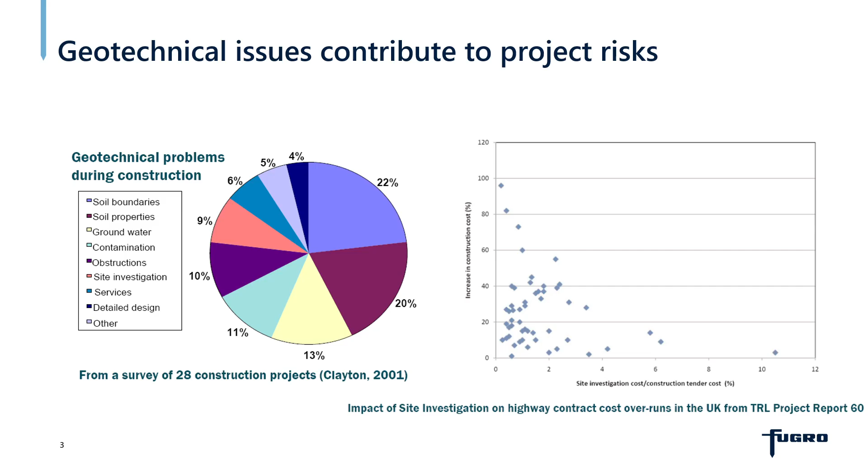So this is not discussing earthquakes, but this slide is. So adding the earthquake component, earthquake-related ground risks. They are often really controlling. For you who practice in seismically active areas, you'll know that in these areas, these types of risks often dominate the risk profile of projects, and they can control even project feasibility, not to mention costs.

And it is our duty as geoprofessionals in the earthquake engineering community to help our clients best manage those earthquake-related ground risks. But what are these risks related to? It's basically the uncertainties, and there are two types of uncertainties that I'm showing here. First, related to the variability in the ground conditions, so uncertainty with respect to how ground conditions vary. Think of it as stratigraphy, but also properties.

And here, let's distinguish between the inherent variability of the ground medium and then the uncertainty which is associated with our limited ability to sample it and characterize it, so due to limited data. And then there is another type of uncertainty which has to do with how the ground and asset will respond to loads, and here I'm going to focus on earthquake loads.

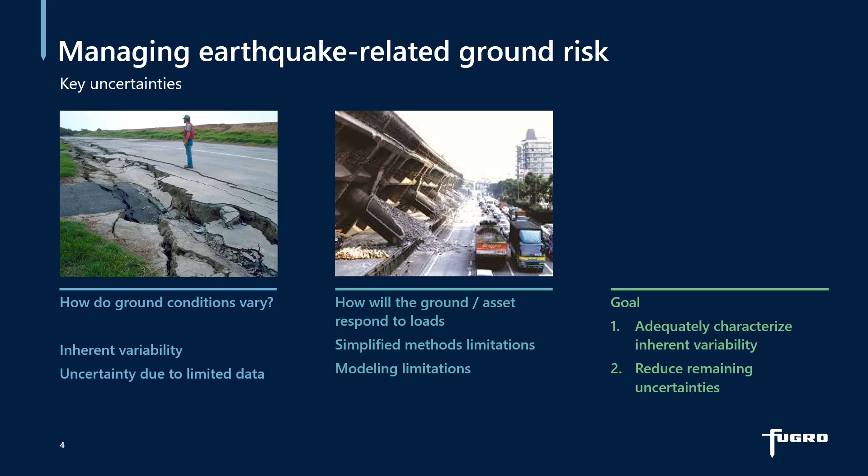So now, looking at the state of practice for seismic design, I think it has come a long way, at least for the past decade or a bit more that I have been practicing, from more prescriptive approaches to performance-based design. Here I'm showing an example from the Canadian Highway Bridge Design Code that specifies multiple hazard levels, and there are performance objectives that are tied to each of these hazard levels. So one would do analysis for several hazard levels and calculate a response of a system.

However, you would notice that for seismic design typically, and this is coming from the same code, a geotechnical engineer would typically use a characteristic geotechnical parameter, which is defined as a cautious estimate of the mean value. And this definition is not very accurate, or there is subjectivity there. It appears that there is an attempt to cover for some uncertainty there, but without really defining or quantifying what cautious means.

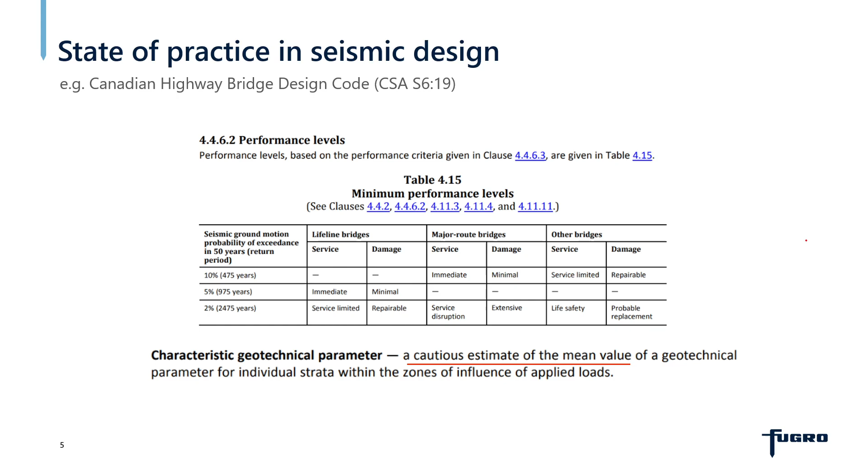But we also know that a cautious mean value is not uniquely defined, right? What is cautious for stiffness may not be cautious for strength. So this is a limitation in performance-based design in seismic engineering. Also, there are a couple of other things to note. These are approaches that are set in a pseudo-probabilistic framework, where essentially a system is modeled with a set of mean-like parameters, or parameters that approximate a mean-like value.

And they are conditioned on a return period for the earthquake loads. But this does not provide a distribution on the outcome. It does not provide a distribution on the decision variable that an owner may need to make decisions. And taking this argument a bit further, for highly nonlinear systems, for brittle systems, the return period of the decision variable may not be the same as the return period of the input earthquake. So there may be a mismatch for some projects, for some systems.

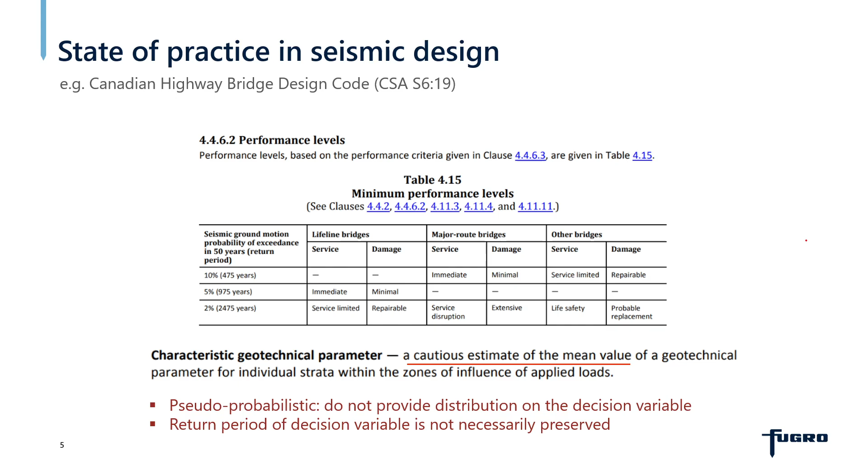There are frameworks that are more rigorous to calculate risk, incorporating uncertainty and inherent variabilities in a rigorous analytical manner, using a series of fragility curves to correlate input motions to output and all the way to a decision variable. And with these approaches, you can calculate a hazard curve for what matters, which is the ultimate decision variable. And this hazard curve can give one the center, the body, and the range of the distribution of that outcome, which is not true for pseudo-probabilistic approaches that we're currently used to.

So with that as a background for the motivation for the talk, and I know I didn't present an outline, these were my introductory slides, I would like then to take this opportunity to present two projects. And in these two projects, there are some common threads. The owner was not able to make decisions for how to move forward because of either the uncertainty in the geotechnical conditions or the complex system. And in these cases, we adopted a risk-based framework to quantify and calculate risk to enable the owner to make informative decisions to move forward.

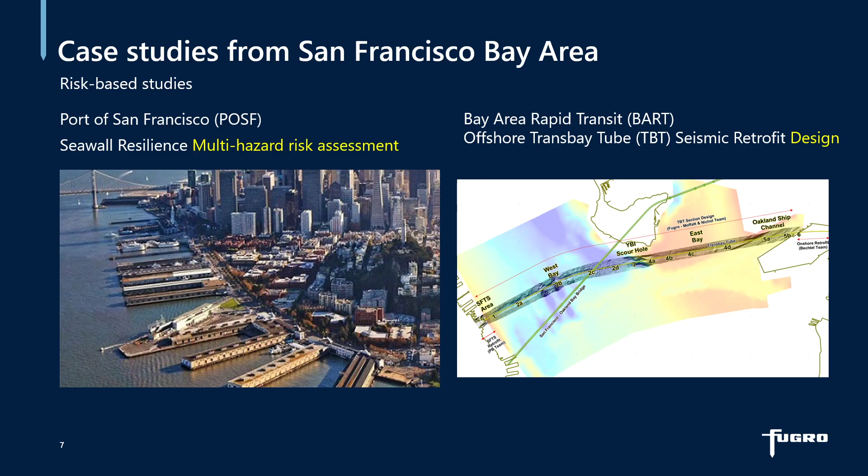The second is the Bay Area Rapid Transit, BART, Offshore Transbay Tube Seismic Retrofit Design Project. This is an immersed tube that connects the cities of San Francisco and Oakland under the bay. And this is a retrofit design project, and you're going to see again we used a risk-based framework to help the owner make decisions with respect to the scope and the extent of the retrofit of this tube.

So looking at these projects and the seismic setting, both are linear infrastructure projects, approximately 5 kilometers long. To the left, the Port of San Francisco, the seawall is the main feature. I'm going to talk about it in detail in the next slides. It essentially marks the northeast edge of the San Francisco Peninsula. To the right is the immersed tube, which connects the cities of Oakland and San Francisco.

And here, these projects are within 15 kilometers of two major faults in the area, the Hayward Fault, which is capable of approximately a magnitude 7.3 characteristic earthquake, and the San Andreas, which is capable of approximately a magnitude 8 earthquake. So this is unlike Vancouver, where you may have different types of seismic sources. We're in active, shallow tectonic margins, and we have well-defined strike-slip faults that control the hazard. These faults produced large earthquakes in the recent past.

The San Andreas fault was responsible for the 1906 earthquake. It was a magnitude 7.9. You may have heard of it as the Great Fire in San Francisco, because many utilities broke and there was devastation caused primarily by fires rather than ground shaking, although there was indeed damage from ground shaking.

And then there was a more recent earthquake in 1989, the 6.9 Loma Prieta earthquake. This was again produced on the San Andreas Fault, but 80 kilometers south of San Francisco. So the shaking levels were relatively low, although we still saw ground failures in that earthquake. The Hayward Fault hasn't produced a strong earthquake since 1868. So this is the one that we're really expecting to go next. And USGS gives a 72% probability of a magnitude larger than 6.7 occurring in the area before 2043.

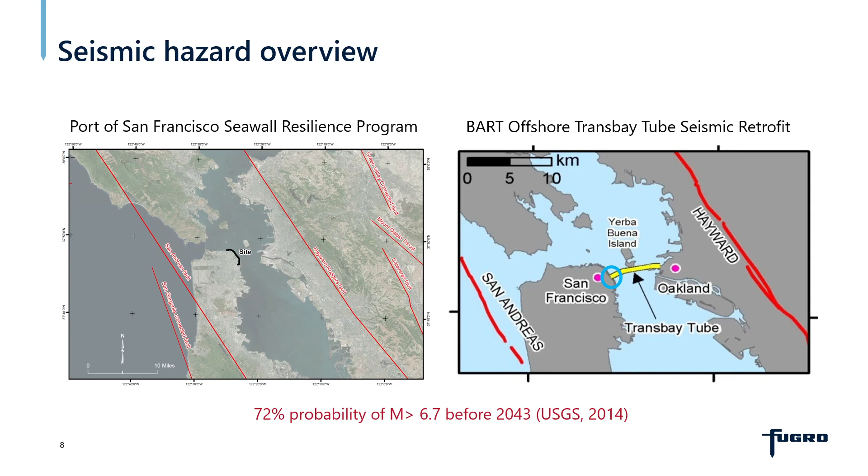So quite a high probability. So let's look at this location here where the two alignments intersect. And this is a pretty picture of where BART transitions from offshore to onshore under the landmark Ferry Building in the Port of San Francisco and continues into the city of San Francisco. So what are the ground motions estimated at that location?

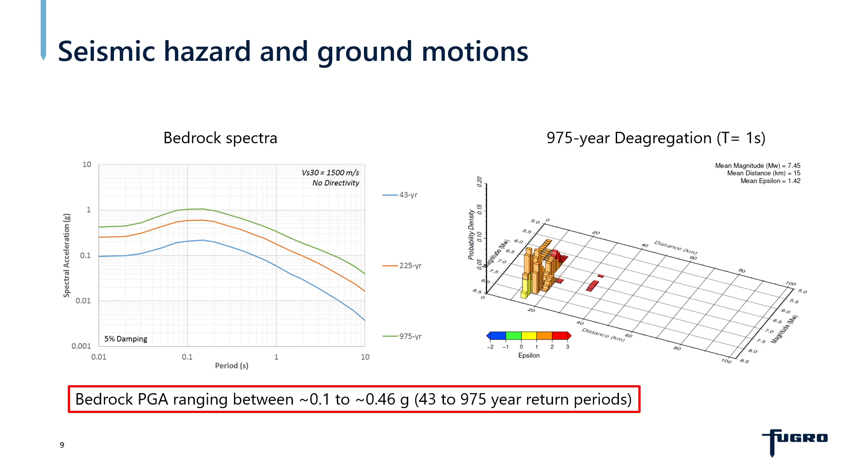I'm showing to the left spectra on bedrock for 3 return periods, starting from the 43 years all the way to 975. And if we look at 975, peak ground accelerations are around 0.45, 0.46 Gs. This is quite high, with similar acceleration levels at 1 second. And you see on the deaggregation plot to the right, this hazard is primarily dominated by events 7 to 8, between distances 10 to 20 kilometers, and these are earthquakes on the Hayward and the San Andreas Fault.

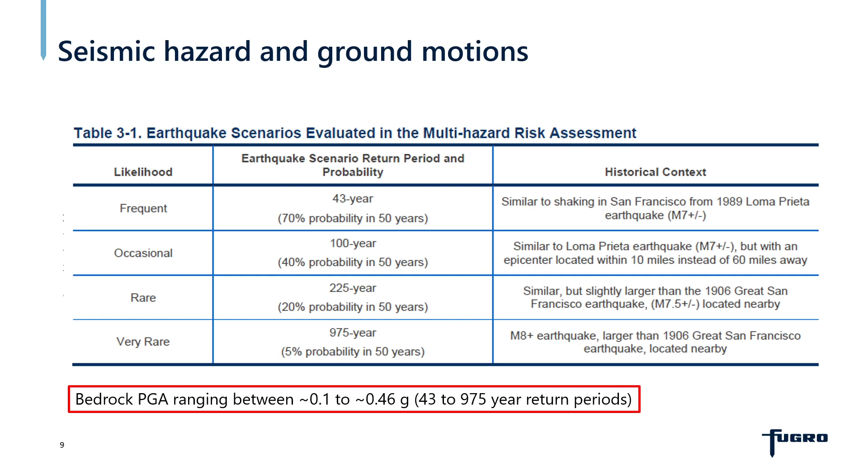So for one of the two projects, the multi-hazard risk assessment included 4 levels of earthquake, which were selected to capture a range from weaker, more frequent events to occasional, rare, very rare events for the 975. And so this is what we performed analysis on. Peak ground accelerations, again, around 0.1 G for the 43-year event, 0.46 approximately for the 975.

And at the heart of this study is the seawall, which defines the transition from land to water. And it's essentially the foundation of the city of San Francisco, of the waterfront in this part. And so the area around the seawall, which is referred to as the waterfront, probably many of you know, you have been there, you have visited. It's a very vibrant area, right adjacent to the bay.

There are a lot of popular attractions: a baseball stadium, cruise ship terminals, markets, promenades, the iconic ferry building. It attracts more than 24 million people per year. There are lots of businesses, restaurants, but also disaster response facilities for evacuation during a potential disaster, transportation networks, utilities. So there is a lot going on, and this area is really the economic backbone of San Francisco with more than 100 billion in assets.

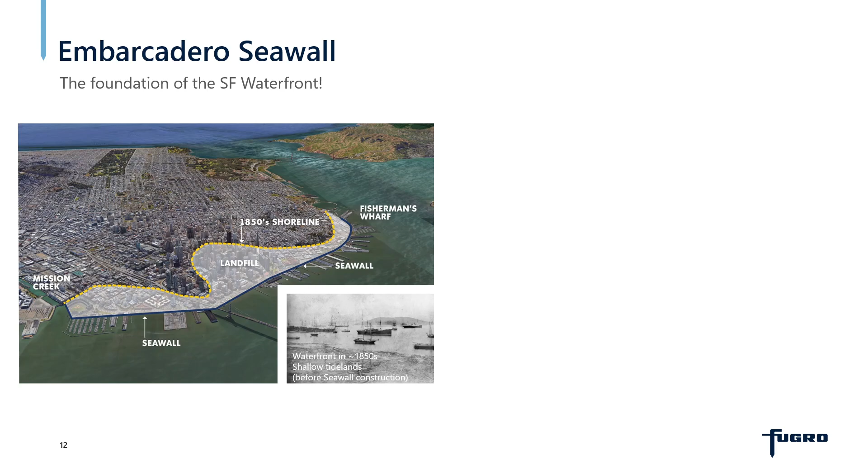Now, the Embarcadero seawall, which you see here in the plan view with the blue line, is the foundation of the waterfront, as I said, and it was built more than 100 years ago, reclaiming land from the bay. You see also there some pictures from before the seawall was built. And looking here at the cross-section, the seawall was built by first excavating a trench in the native soils, which in this case is what is called Young Bay mud. It is a soft to firm marine clay.

Then rock was placed to create this pyramid-shaped dike, which was capped with a concrete wall approximately 3 meters high, although this construction is not the same along the entire length. And then this provided the foundation for pile-supported bulkhead wharfs, and then buildings that were built on those wharfs.

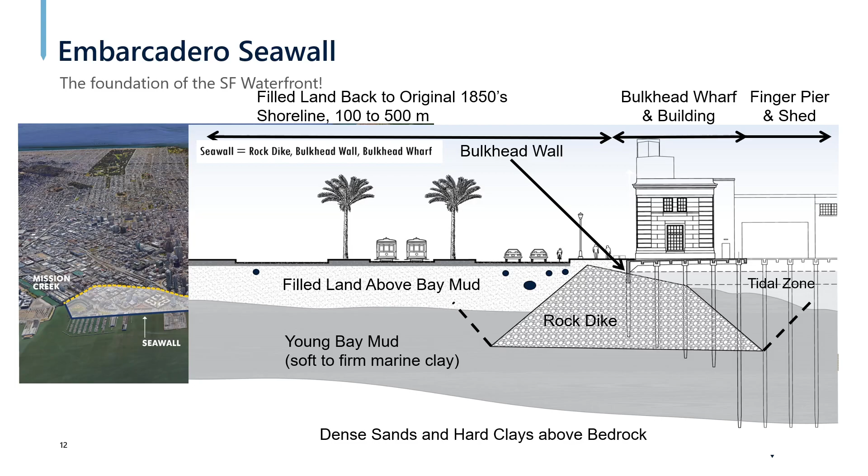To the land side of the seawall, the area was filled with heterogeneous fill that was essentially dumped into place, so we'll see it is liquefiable and quite heterogeneous. And again, all this system was built around the 1900s, so without today's understanding of the high seismic hazard in the area and, of course, today's seismic standards.

So what was the owner, the Port of San Francisco, concerned about? The first hazard was earthquake-related. So the possibility that during strong shaking, the liquefiable fill will lose strength and spread horizontally towards the bay. The Young Bay mud beneath the seawall would also soften up and start to slide towards the bay. This would disrupt the piles, which would break, would damage the wharf, and then that would create damage to the buildings. On the land side, you also see that there would be cracks on the Embarcadero highway, and the evacuation route would be disrupted.

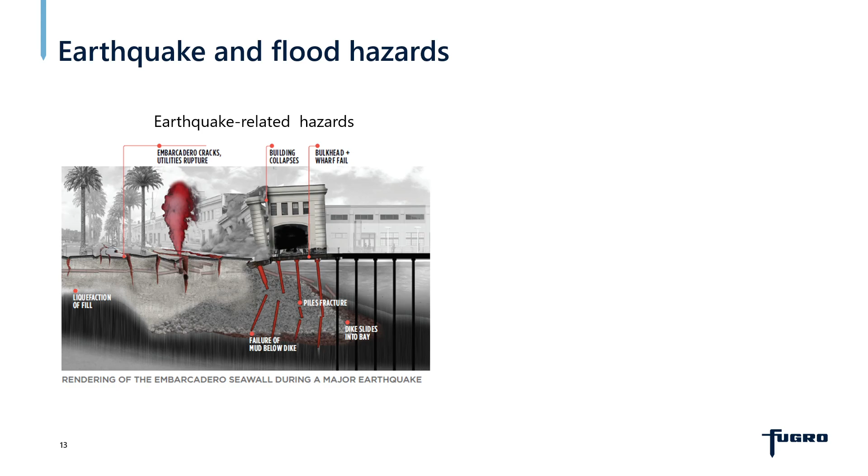So such a potential response, apart from being very threatening to life safety, also has the potential to create significant economic damages. The second hazard, which I'm not going to talk about today, is related to coastal flood, but this was addressed by the same study, the multi-hazard risk assessment. This is why multi-hazard, earthquake and flood.

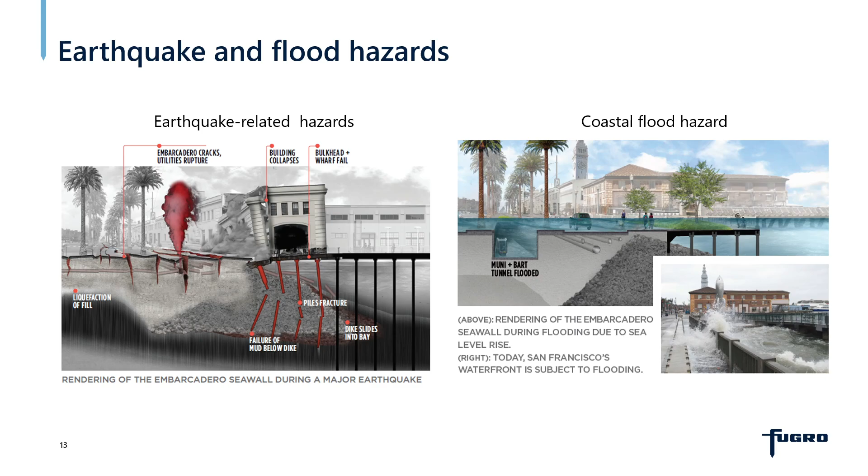But what I'd like to point out is that the timelines of the two hazards are not similar. Earthquake is more urgent, more immediate, and coastal flood, primarily associated with sea level rise, is a bit longer term. But the port, recognizing both hazards, embarked on a program back in 2017, the Waterfront Resilience Program, to essentially create a sustainable and resilient waterfront, part of which is the Embarcadero Seawall Program, which I'm going to talk about today.

And this is a 10-year program with a goal to strengthen for earthquake and protect from flood, and plan to adapt and envision for longer term. So the port, recognizing the high variability of the conditions, and we'll see the geotechnical conditions are quite variable, but also the complexity of the different structures, they asked for a risk assessment study. So they were the ones who requested that this study be performed to help them prioritize the investment of their funds on retrofit projects.

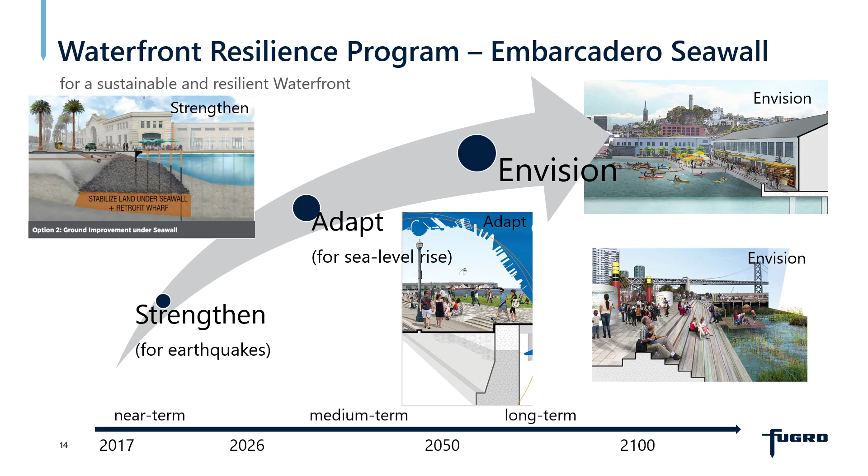So this project was won by a team which was led by CH2M Hill and Arcadis. They were the program manager. Fugro is the lead geotechnical engineer. I'm in the role of the lead geotechnical engineer. SGH is the lead coastal and structural engineer in this study. And this team implemented the risk framework that the port requested to essentially help guide the port's investment decision. And there are three building blocks in this type of framework.

The first is to define the hazards, so in this case, the earthquake. The second is evaluate essentially the vulnerability to these hazards, identifying the consequences, and then combine those two components to assess the risk. And the risk here was assessed in terms of variables that addressed both casualties, so life safety, but also economic variables, direct damages, downtime, and such. So there was a big team, a lot of reports were produced, but I'd like to, from now on, focus really on the geotechnical aspects of the study.

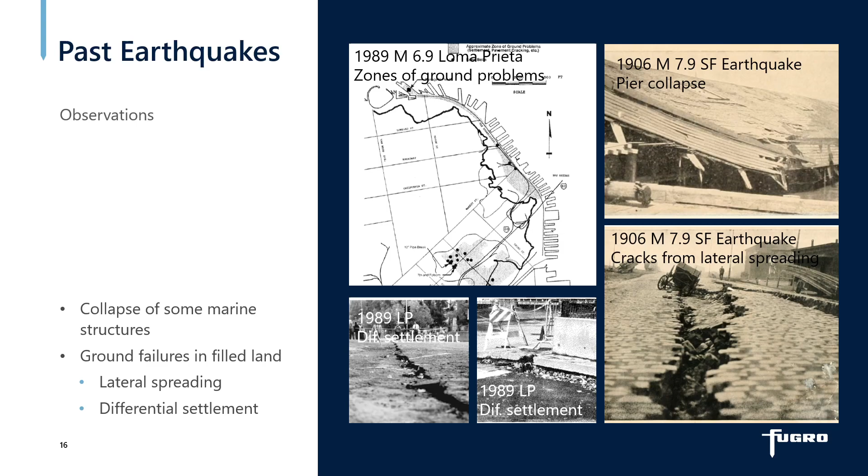So in 1906, displacement, settlements, but horizontal spreading was on the order of maybe half to a meter. For Loma Prieta, it was lower, maybe 5 to 10 centimeters order of magnitude from studies that have been published. So we know something about past performance, and these are observations that can be used for us to calibrate against when we're doing forward studies.

So previously I said that essentially uncertainties in geotechnical parameters and in system response parameters control the risk profiles of projects in highly seismically active areas. So for this particular case, how do these apply? So to the left, we're looking at how do ground conditions vary. I'm showing a geotechnical cross-section. This is a conceptual section. It was prepared based on a desktop study, an overview of the geology of the area before we did our project-specific site investigation program.

And we do see that conditions are expected to be variable. We have variability with respect to the thickness of key layers, such as the Young Bay Mud, that are responsible for the seawall stability, variability with respect to depth to the rock, but you also see these yellow lenses, and these turn out to be sand lenses that are liquefiable and can further compromise seawall stability. So our approach was with a project-specific site investigation plan to characterize this variability in the ground conditions to the best of our ability within the constraints of the project, and essentially maximize the information that we got from the geotechnical data.

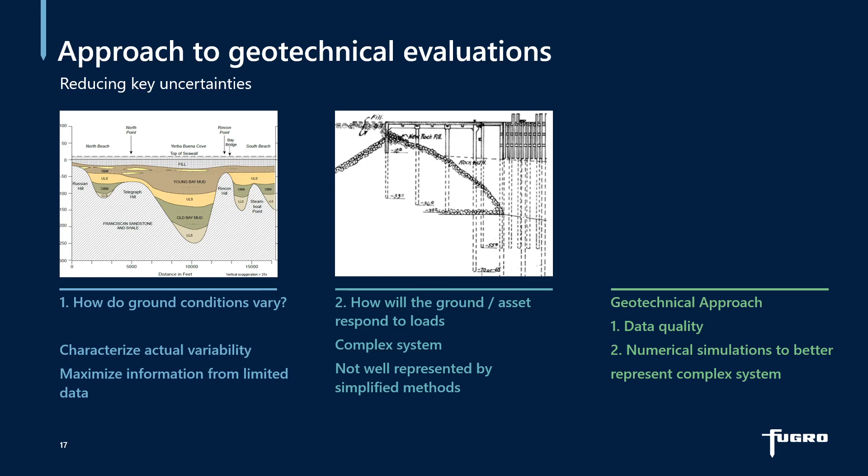When we're looking at the response of the system, this is a relatively complex system, so it wouldn't be very well represented by simplified methods, say like the Bray and Travasarou, as much as I would like to. So here we opted to adopt more advanced numerical tools to better represent the complex soil structure interaction and increase the confidence in the mean response.

Let's see. Let's see if I'm better using this. Maybe. Okay.

Essentially, we determined that for the most part, we could use them to delineate stratigraphy, maybe some of the CPTs for property measurement, but primarily these explorations were used, with few exceptions, to delineate the stratigraphy around the seawall.

Now, we developed a project-specific site investigation plan to be able to obtain relevant data to evaluate seawall stability. And here we really thought about the goals and the objectives, so we want to be very purposeful about delineating the goals and objectives of this plan in order to really maximize the information extracted from each of the explorations. And so we identified goals, for example, here listed in terms of priority: characterization of young bay mud strength and stiffness, and then more detailed objectives within that goal.

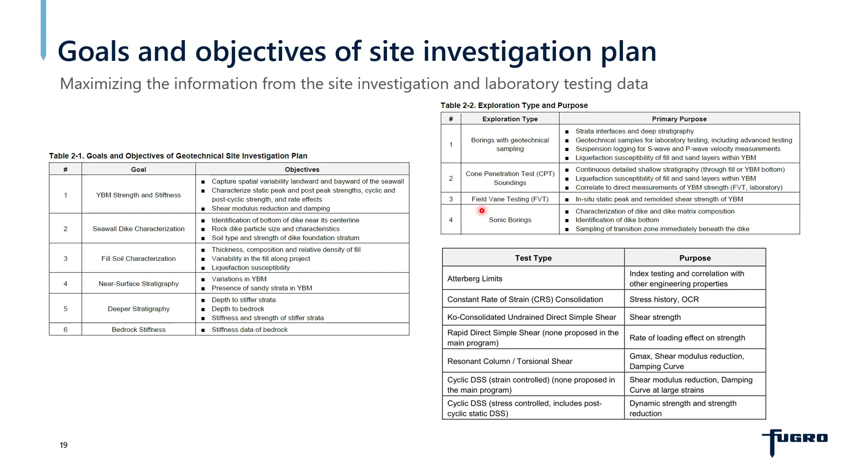So we had 4, I think 5 different types of explorations between borings and sampling. We did cone penetration tests, field vanes for strength measurements, and sonic borings to get a better characterization of the dike. And also similar thinking went into developing an adequate laboratory testing program.

So all in all, we ended up with 89 new recommended explorations of 5 different types, and these were spaced in the immediate vicinity of the wall, such that they're more relevant for the seawall stability, and spaced such that we can get the variability along the length of the seawall.

But here an interesting concept was that we planned what we're calling couples of explorations. So for example, CPT and in situ vane couples, or triplets, CPT, vane and a boring, such that we can get measurements of the same parameter, for example undrained shear strength, from 3 different types of tests, and develop project-specific calibrations.

These would increase our confidence in our measurements and have the potential of reducing the uncertainty in the measurement, but also we could use the less disruptive, more economical CPT, which is shown here in green, to characterize a bigger part of the waterfront, again considering budget and time constraints.

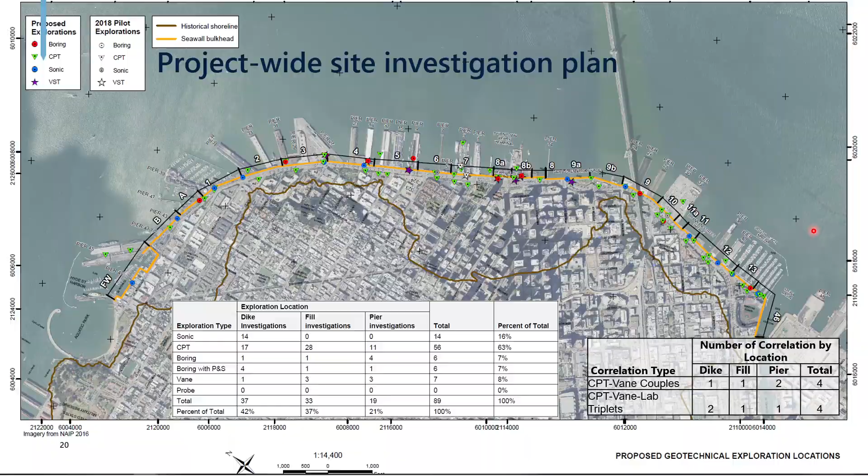These are some pictures from the exploration program. It was one of the best sites to work at. It almost felt like vacation being out there.

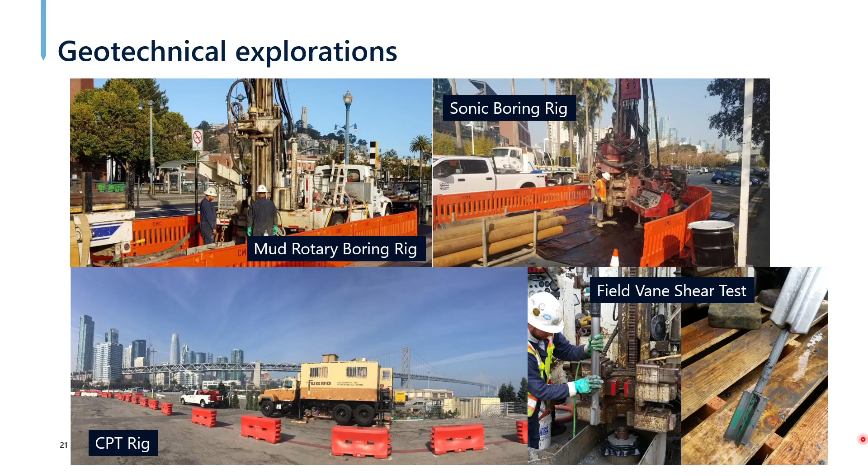And it was executed smoothly. It was well thought out, and we gave a lot of weight to those areas where we had the couples and triplets of explorations, and then we went with many CPTs. This really helped, as you're going to see.

So this is a reinterpreted subsurface cross-section going past the conceptual, where I'm focusing here on Yerba Buena Cove, which is the area where we have the thicker young bay mud, approximately 30 meters. Apologies, this project in the US was in imperial units, but I'm trying to do the conversion and talk in meters. So approximately 30 meters of young bay mud in this area. And again, not all these explorations were new, but most of the CPTs were ours.

So this was a 3-dimensional model. I'm cutting 3 sections that are shown here in blue. What is shown here is the cross-section bay side of the seawall, the marine cross-section, if you will. And what you see is that the CPTs picked up this silty sand layer that we're referring to as young bay mud sand, because it occurred like sheets, interbeds within the young bay mud. And it ended up being critical to the seawall stability because it ended up being liquefiable.

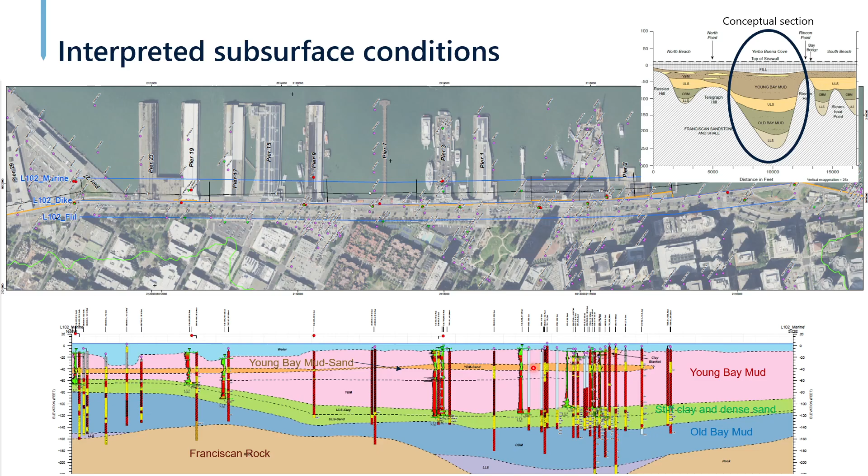But let's first look at the characterization of the young bay mud. One of the most important parameters for the seawall stability is the strength of this material, which is the foundation of the dike. So here I'm showing a cross-section in one part of the seawall. You're seeing the dike here. And I want to present results for these exploration triplets. One is here inland, and there is another triplet bay side of the wall, where we performed in situ vanes, CPTs, and then a laboratory test.

Before we tested in the lab, we x-rayed every tube, so we were sure that we had good quality samples. To the right, you see results comparing these three sets of tests in these two locations: the CPTs, the field vanes, which were run very frequently, every 1.5 meters, to get a nearly continuous profile of strength with depth, and results from monotonic undrained direct simple shear tests. And here we see really excellent comparison between these three sets of data. And this comparison held for all the couples and triplets along the seawall.

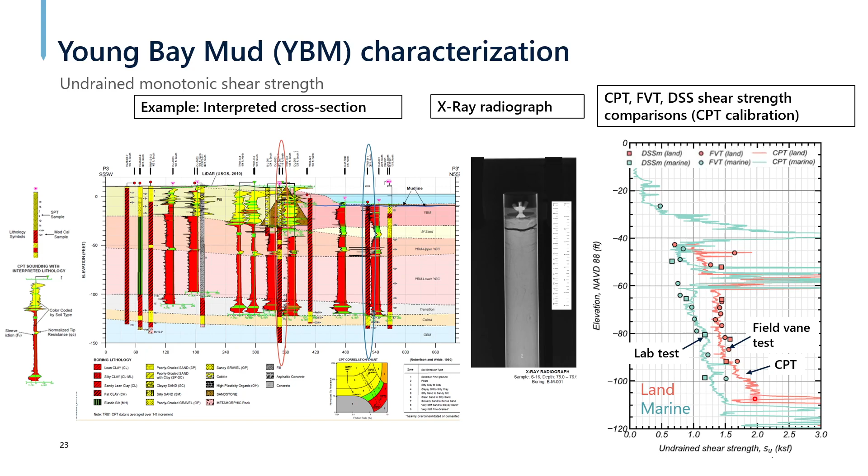We used one single Nkt factor to calibrate the CPT along the entire length of the seawall. So this type of data really increased our confidence and reduced the uncertainty in the strength parameter of the Young Bay mud that was used for modeling.

One of the key elements of the response was the cyclic response. So we did stress-controlled direct simple shear tests and strain-controlled tests to characterize cyclic strengths, to characterize the evolution of the shear strain with a number of loads.

And here we're also concerned about post-cyclic strength degradation. So we also did a series of tests where we recentered the specimen after it was cycled and then pushed monotonically to look at the post-cyclic monotonic strength. So we developed quite an extensive data set that was then used to calibrate the input for the numerical models.

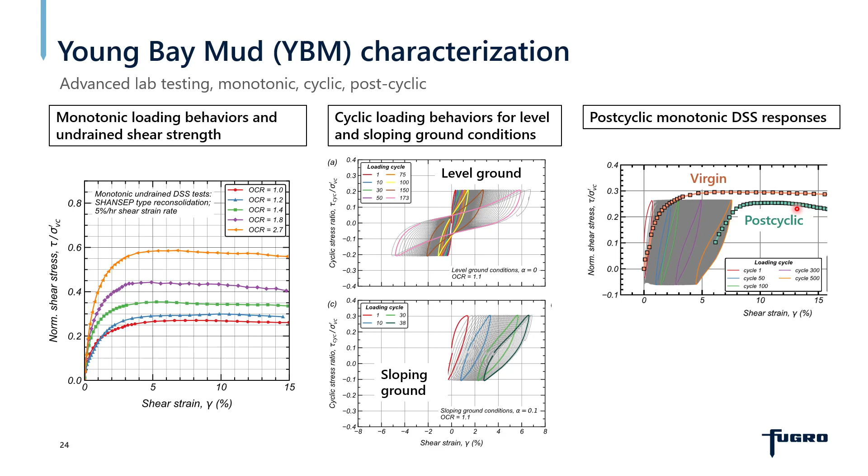So when we're looking at the sand, here's where, again, the CPTs coupled with borings came in very handy. The CPTs were very successful in delineating the thickness and the extent of this layer along the seawall. But then we used borings with targeted sampling for classification, and we were able to develop project-specific correlations of the fines content from the CPT with lab tests.

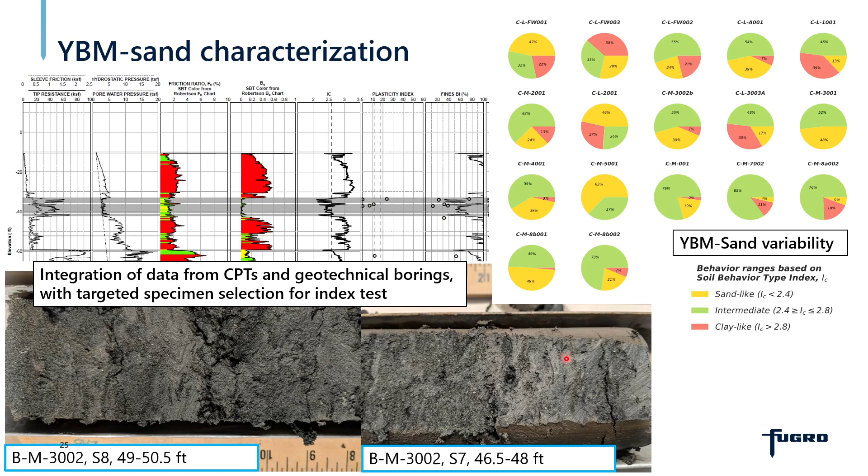So with that, on the characterization, let's go on to how the system responds to earthquake loads, so uncertainty in the system response. Here we performed two-dimensional analysis with FLAC. For the fills and the liquefiable sand, we used PM4Sand from Boulanger, but also UBCSand as an alternative model to account for epistemic uncertainty.

For the Young Bay mud, PM4Silt with an alternative UBCHyst by Dr. Naesgaard. And then, despite the fact that we had 2D analysis, we did model piles with springs, so we did model pinning effects from the wharfs and the piers wherever applicable.

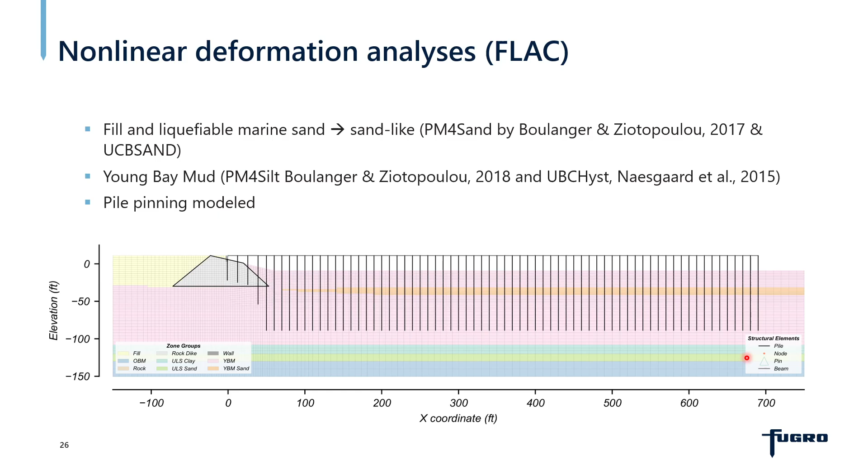So before we trust these analyses and advise the client with respect to the level of deformations for the different levels of earthquakes, we want to have confidence that they can indeed replicate observed performance. So the first step is to calibrate the input parameters, either with project-specific tests, which we did here, or available tests in the literature.

So here, for PM4Silt and UBCHyst, we focused on capturing the small strain stiffness and stiffness degradation with shear strain, modulus reduction, and damping. But more importantly, as I said before, the cyclic strength and the potential for large shear strain accumulation. And we had alternative models that we used in our analysis.

For liquefaction, we obviously focused on triggering, but more importantly, the post-liquefaction shear strain accumulation, which we're also referring to as compliance rate. Another thing to say about the calibration of the constitutive models, having done a lot of work in this area, it's very difficult with one set of parameters to capture all behaviors that would be applicable for a soil medium.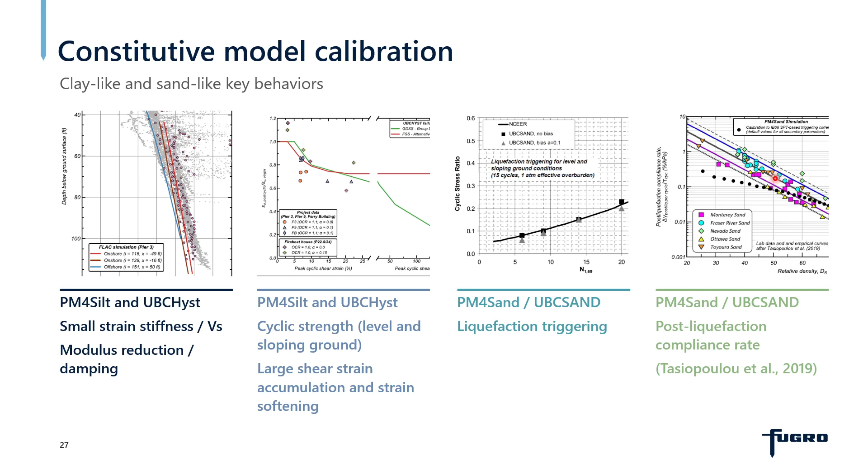So here what we want to do is focus on the key behaviors that are relevant for our system and make sure that we're not off in other responses. And here we really focused our calibration on strength and cyclic strength and also post-liquefaction shear strain accumulation, also making sure that we were not off in the propagation of seismic waves.

And so with an appropriate calibration, going on to a validation at the system level, this is looking at the ability of the numerical model to represent key physical phenomena that are relevant for our system. So here we analyzed experiments that are available in the literature. For example, a clay embankment, looking at slope instability, looking at the calibration approaches for the same model with different input parameters, and which approach gets us closer to the observed response.

We participated in the Liquefaction Experiment and Analysis Project, LEAP, and performed extensive comparisons against centrifuge experiments modeling lateral spreading. We analyzed centrifuge experiments looking at site response analysis with very good comparisons between observed response, here in black, and computed response of surface spectra.

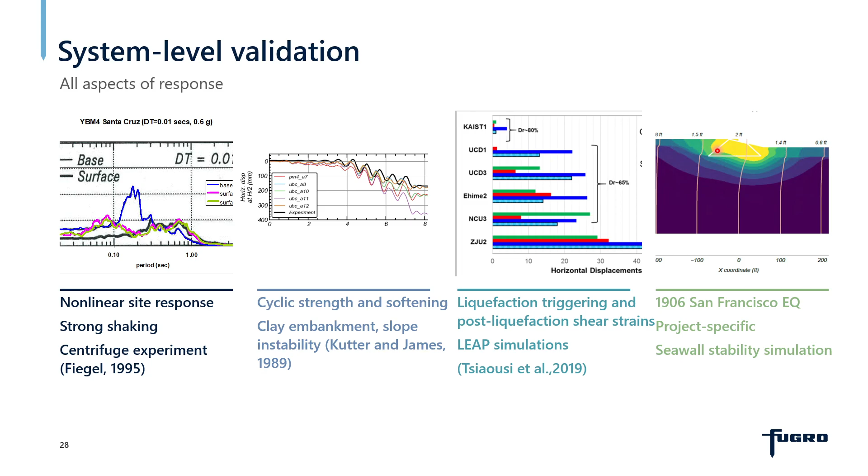And we also analyzed the 1906 earthquake and the Loma Prieta earthquake. Of course, for 1906, we did not have recordings. We used simulations. And we compared the estimates of displacements, approximately 2 feet, so 60 centimeters. This was on the order of magnitude of what was reported in the literature. So these analyses more than passed the reasonableness check. So we felt that we had a tool that we could use confidently to estimate system response.

So here I'm showing results from our analysis for 4 cross-sections that vary with respect to the conditions, the types of foundations of the dike and the thickness. To the bottom left, we're looking at thin Young Bay mud. Here is where we see localized deformations. We see rotation of the concrete wall.

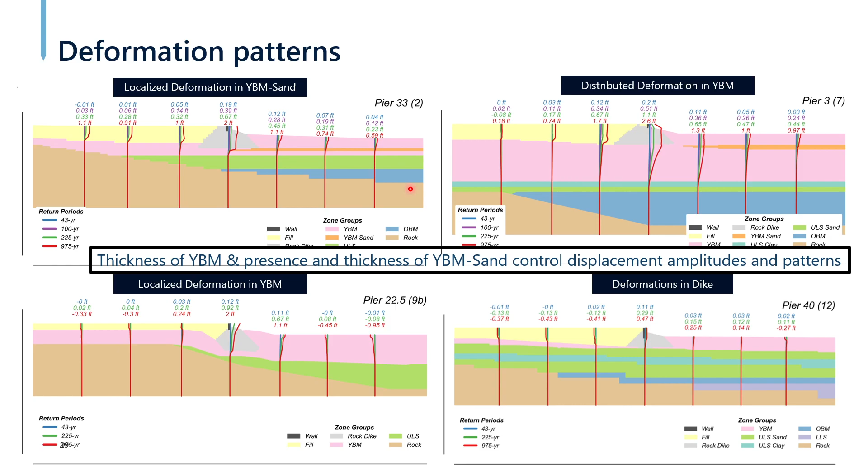Where we have this Young Bay mud sand layer, we see very localized deformation that can be very disruptive to piles. To the right, where we have thicker Young Bay mud, we see more distributed deformations. And here in this case, we don't have softer Young Bay mud under the dike, so we have very little deformations. So all in all, the thickness of the Young Bay mud and the presence of Young Bay mud sand and its thickness affected the amplitude of deformation and the deformation patterns.

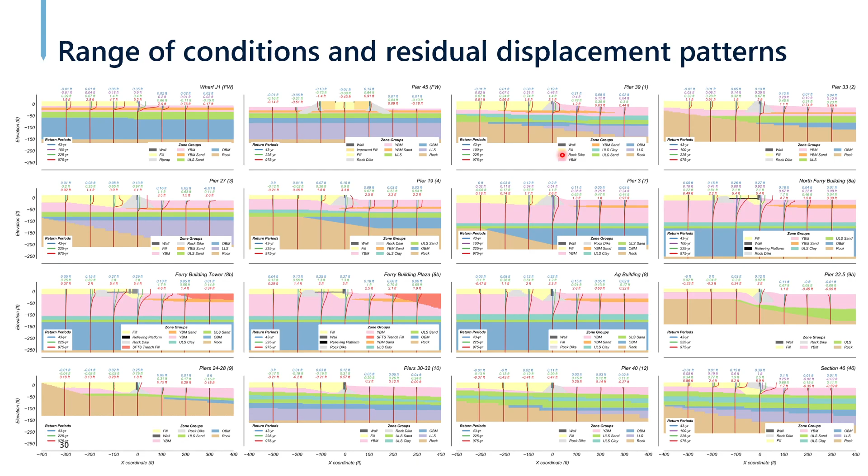We analyzed many different cross-sections along the waterfront, and these are what I'm calling spaghetti plots, the horizontal residual displacement at different locations along the cross-section. But looking at the displacements of the center line of the dike, these are ranges that we are coming up with, and these are for mean of 11 ground motions. So for the 43-year earthquake, relatively small displacement, 3 to 10 centimeters. For 100 years, 15 to 30.

225, this is where we start getting to larger deformations, especially in areas like this to the north of the waterfront, where we have bigger thicknesses of this Young Bay mud sand beneath the dike. And for 975, getting to very large deformations.

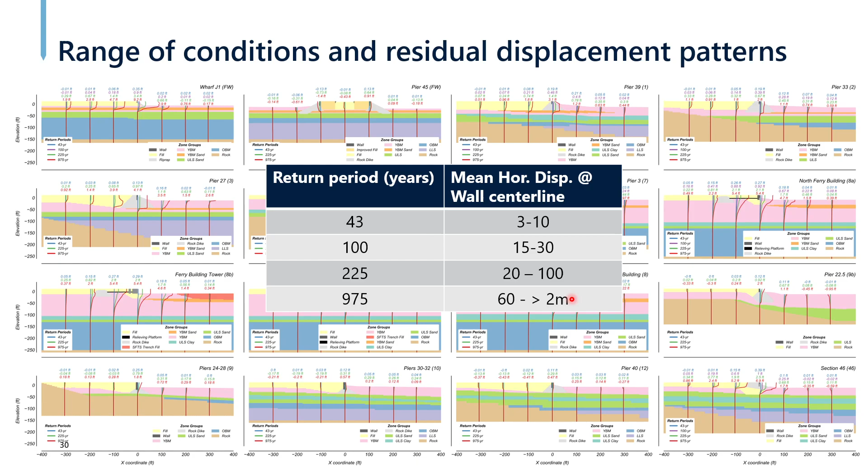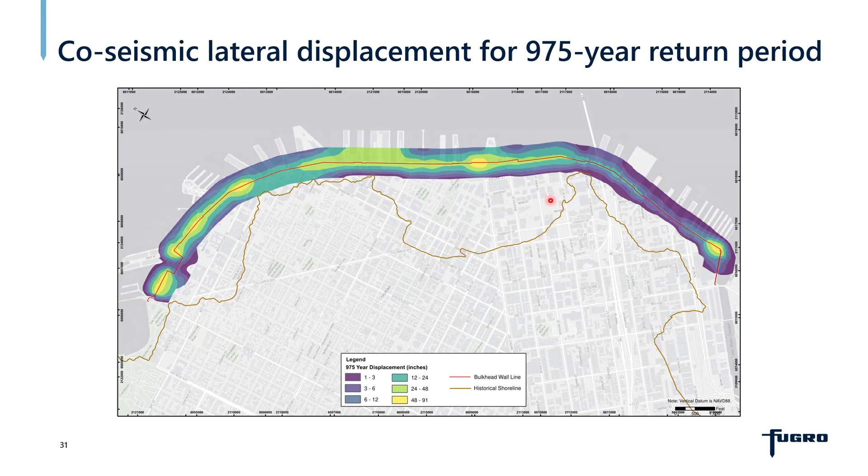So now these results, we developed a methodology to be able to interpolate for other locations, and we're able to develop contours that were also used for the risk assessment of buildings on land. But this is the types of input that was used by the structural engineer to develop the fragilities.

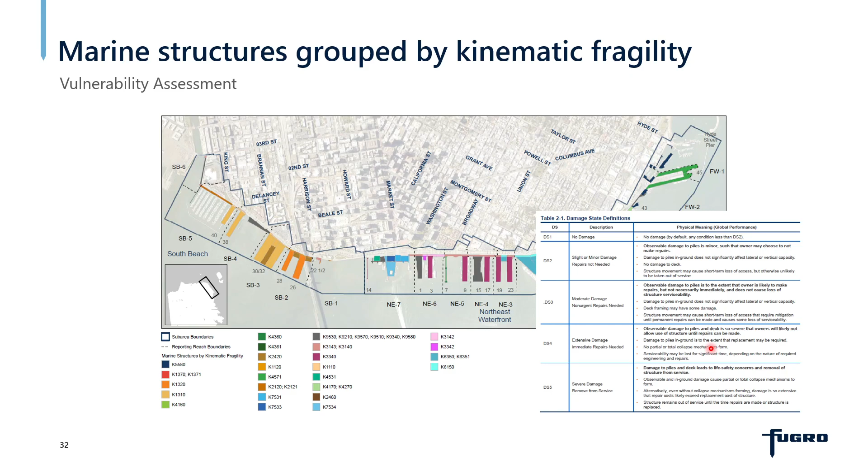So the structural engineer was looking at more than 100 different structures along the waterfront based on different construction methods and different materials. They grouped them in 17 groups, and they developed fragility curves as a function of 5 different damage states, which were defined in quite a bit of detail. And then these fragility curves were used in a risk analysis, which is based on a HAZUS approach, where we're estimating economic losses, direct damages, and other losses, but also casualties.

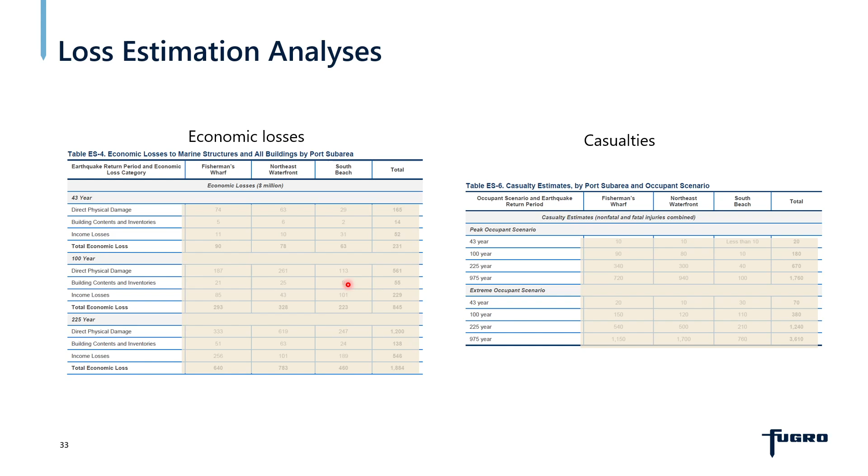Please don't focus on the numbers. I don't mean to show the actual numbers, but just the framework. These types of results then were used by the port to select early projects to move to the design and the construction phase. So now the port has identified 11 projects that are shown here with the blue that they are prioritizing based on this risk assessment. They are advancing, and we are now supporting them. We're continuing on the next phase, which includes essentially developing retrofit alternatives and up to 15% design.

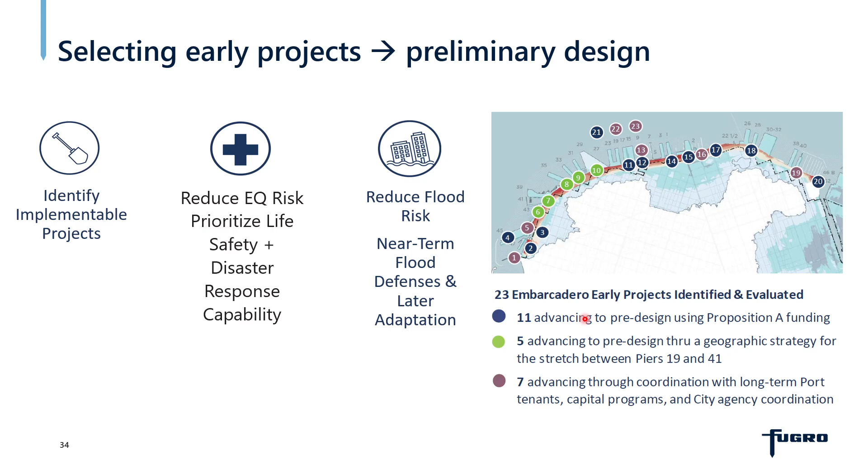So with that, wrapping up this project, what was it from the geotechnical perspective that made a difference, that helped the port make good decisions and prioritize their investments? 2 things. One to the left related to how the ground conditions vary. We planned our site investigation very judiciously, with very clear goals and objectives in mind, with a goal to really maximize the information that was extracted from each of the explorations. And this helped increase the confidence and reduce the uncertainty in some key parameters that were governing the seawall stability.

And to the right, we increased the confidence in the engineering analysis by selecting the right level of modeling, not more than that, not less than that. So avoiding oversimplifications, which tend to increase uncertainty, but also avoid over-analysis, which may be more appropriate when you're going into final design.

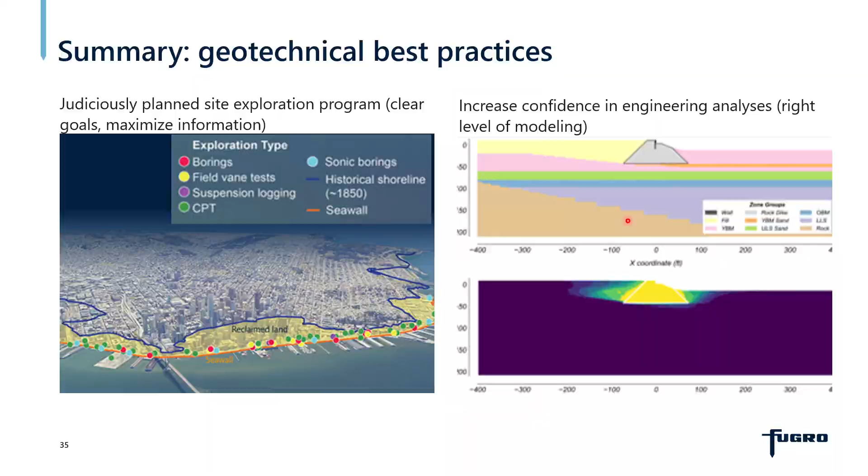So with that, I'm going to switch gears and go to the second project, which is the immersed tube tunnel, BART offshore transbay tube seismic retrofit. It connects, again, San Francisco to Oakland under the bay. And the tube was built back in the 60s when there was limited knowledge of the elevated seismic hazard in the area. And it was built in a trench, which was excavated in native soils. It was filled with liquefiable sands. And the tube segments were essentially lowered and placed and connected in that trench. And these tube segments were 100-meter long segments.

So Fugro, back in 2006, I started with Fugro when we were still working on the proposal for this project, and we were hired to essentially develop a ground mitigation scheme to prevent the tube from uplifting during strong shaking, because the tube is nearly buoyant, and it was perceived that liquefaction-induced uplift was a key vulnerability.

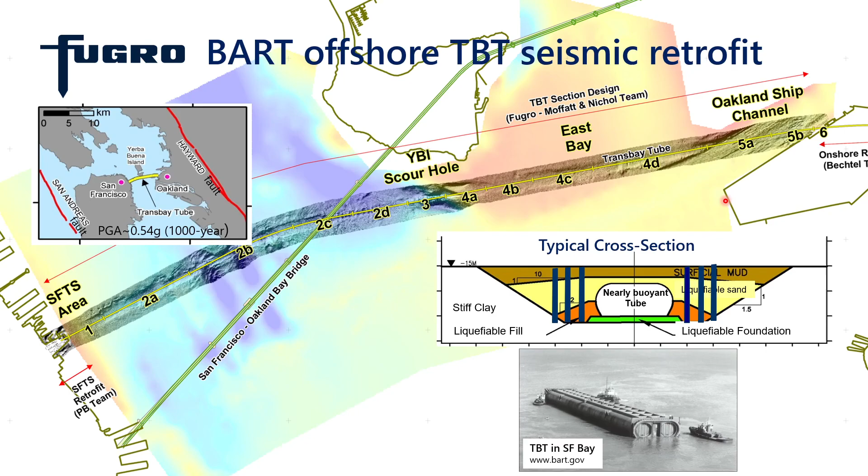We worked on this problem for 2 or 3 years. We did extensive modeling, including centrifuge tests. We put the liquefaction-induced uplift to rest, proposed appropriate retrofits, but through these studies, we identified other areas of vulnerability.

As you see here, we're looking at a longitudinal cross-section, and so you see to the west, near the middle, and to the east, there are areas of sloping ground, and in these areas, there are slope-induced vulnerabilities that are very relevant and that the owner was not initially aware of.

For this project and for the uplift problem, we had pushed a couple of CPTs very close to the tube, within 1.5 meters of the tube, to characterize the relative density of the trench fills. And these CPTs are going to come in handy for this study, the most recent study that I will discuss in this presentation, because they also characterize a small part of the tube trench.

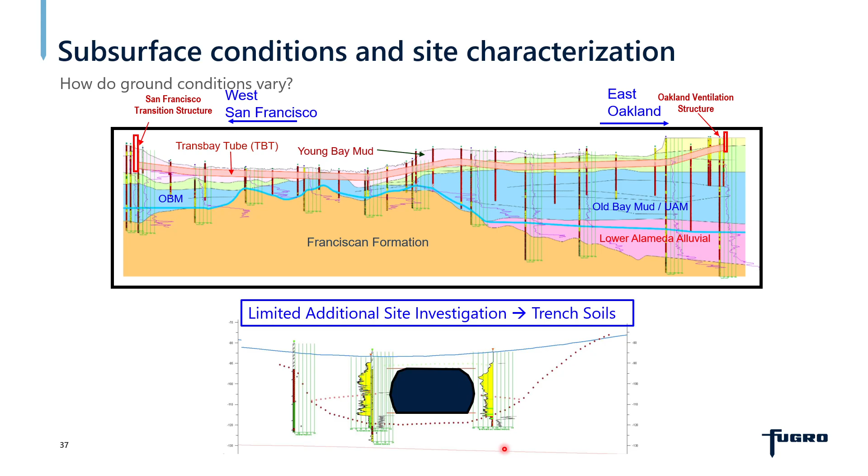So for this project, the owner had project-specific criteria, seismic criteria, 2 levels of earthquake. For the 1,000-year return period, the performance was essentially safe egress, so evacuate people from the tube safely. That was the key performance objective, not saving the tube. And safe egress relates to how quickly the tube can fill if it ruptures during an earthquake. So it relates to water inflow.

And there was a lower performance criterion for the 500-year return period, a lower hazard level, but I don't want to get into specific performance criteria there.

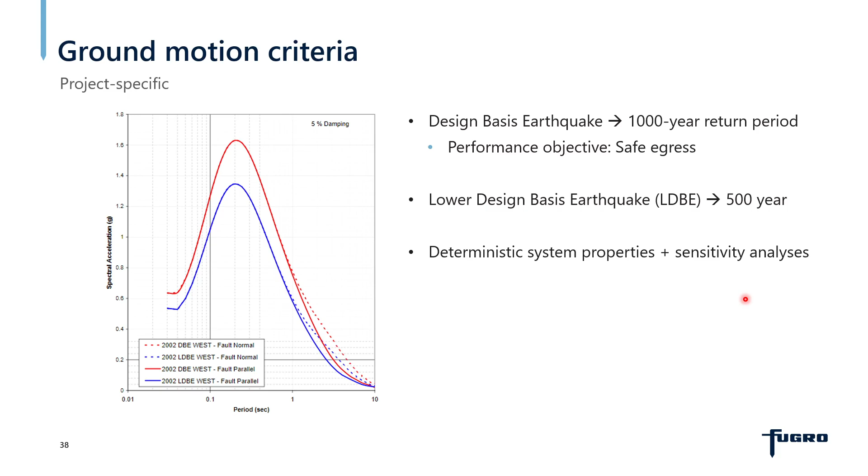How we started analyzing the system was the same concept: use mean-like or deterministic properties and sensitivity analysis to see whether we had a brittle system, and account for some uncertainty in the properties. But we see that we're only able to do so much with this approach. So we had to adopt a different approach.

We were responsible for the geotechnical evaluations to come up with kinematic demands on the tube due to slope instability, transient and residual. These were input into a global analysis that was run by another company, Structural SE Solutions, which were essentially computing the axial strains in the tube. And these strains were input into more detailed models, structural finite element models, to estimate cracking in the tube shell and then water inflow.

And based on these results, back in 2018, when we did the first analysis of this system, we came up with a retrofit strategy that the owner adopted. And this consisted of having a structural shell internally to provide more strength, but also create an impermeable shell from inside the tube.

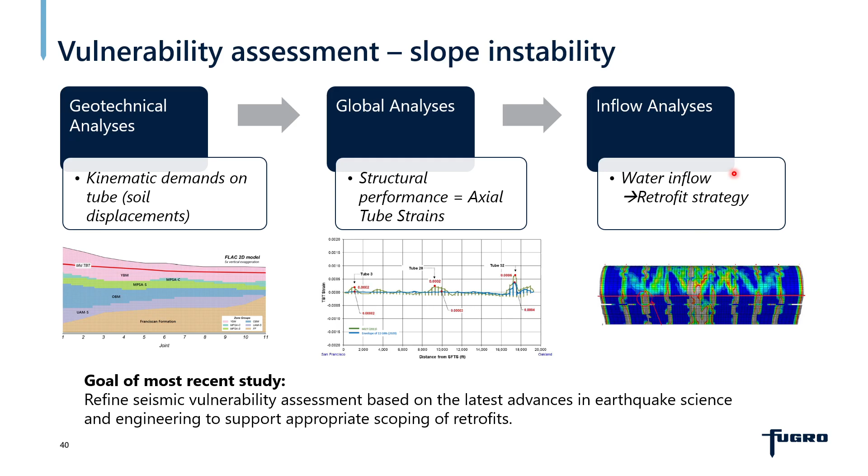And the goal of this reanalysis was to right-size the scope and the extent of the retrofit. So did they have to retrofit the entire tube? How big of a length did they have to install this shell in? And so we started performing this analysis, and as you can appreciate here, this project started back in 2006. So it experienced multiple phases of exploration and analysis for different vulnerabilities, for different problems.

So now we're going to run into a situation where even when we're purposeful about collecting data for the uplift problem, we find that we don't have enough data for the slope stability problem. So what do we do with that?

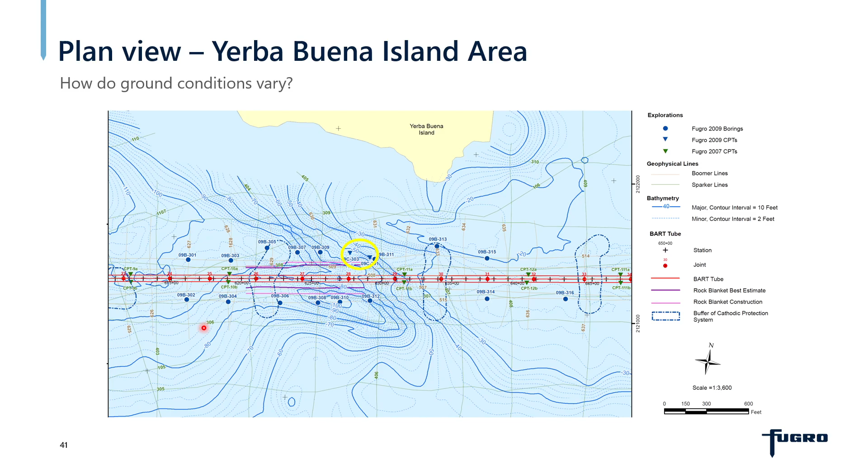Here you're also going to see that we have the old CPTs from where we were working on the uplift problem, and these were the CPT couples that are shown on either side of the tube with green. So with this information, we also built a 3-dimensional ground model. This is where we see the sort of slope coming in.

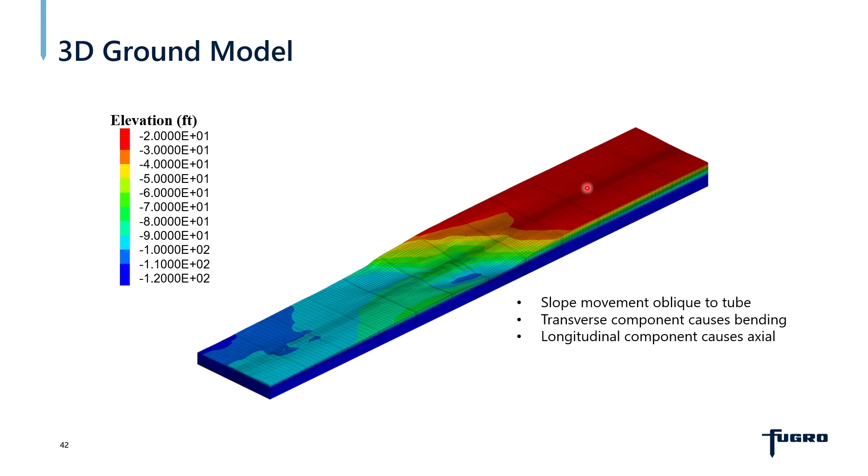And for the purpose of this presentation and this analysis, I will look at the longitudinal cross-section where we have the biggest slope. So 3 longitudinal cross-sections, one through the tube center line, one to the north and one to the south. And this is what they look like. The middle is through the tube center line. You barely see the tube here with the thin

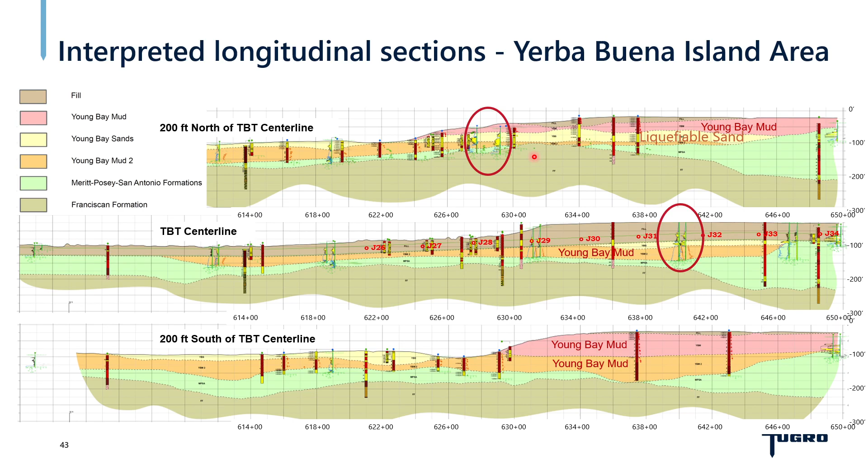green lines. But what we notice is, for the most part, the trench is sitting on Young Bay mud. But there are these 2 CPTs here that are picking up sand, and the sand is loose. And there is also sand upslope of the tube. And if we're looking at those CPTs with depth, the tip resistance is now converted to equivalent clean sand N160, and we also look at the cumulative distribution. With the thin color lines, we have each CPT separately. The thicker lines are different types of averages and distributions, but we see there is a big range.

So what does one do with this range? What do we design for? Are we characterizing this layer with an N160 of 15 based on a mean? Are we trying to capture this distribution, and in what way?

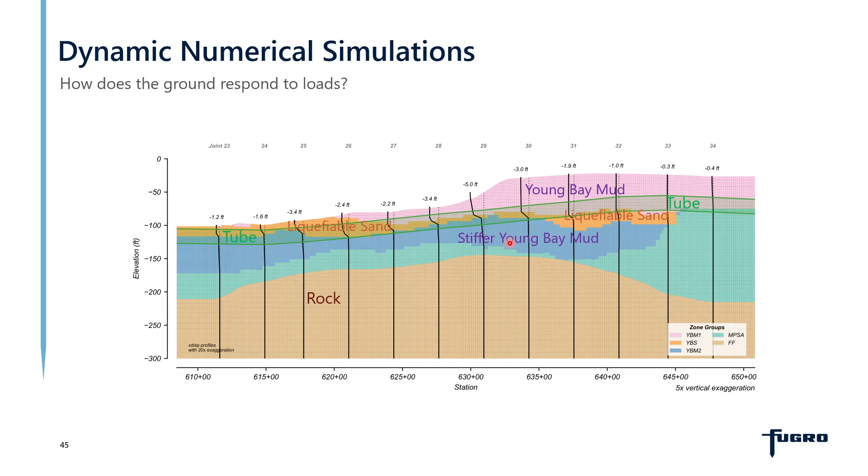So looking at how this affected the slope instability, again, we performed numerical simulations. This is in the tube longitudinal direction, but here is the slope. This liquefiable sand, during strong shaking, develops excess pore pressures and tends to move downslope, dragging the tube with it. And depending on the properties of this sand, for example, if we model the relative density or equivalent N160 with 15 or 20, the displacements are very different.

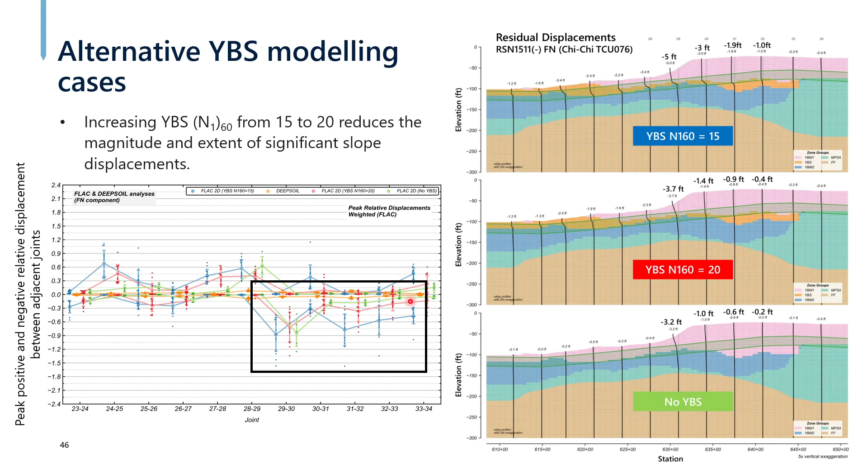More importantly, what I'm showing here is the peak relative displacement between every 100 meters. We're calling these the tube joints. And you see, if we're modeling the sand with N160 of 15, we have relatively big peak differential displacements that also extend quite a bit upslope. With N160 of 20, the displacements are smaller, and these have an effect on the axial strains.

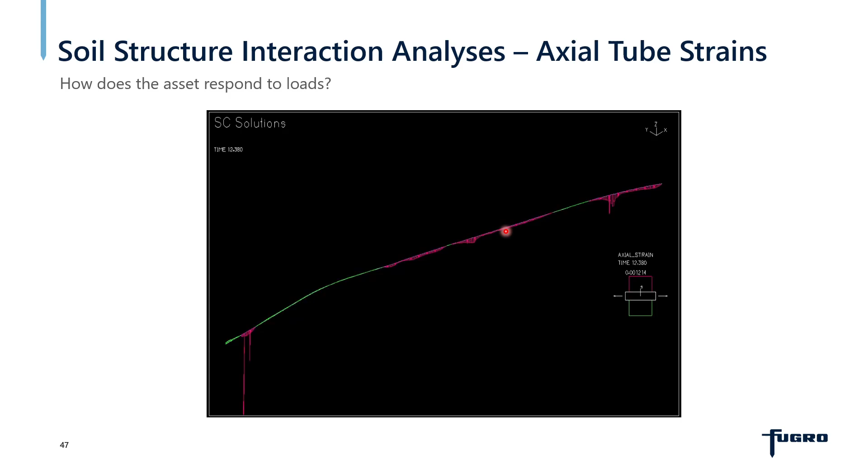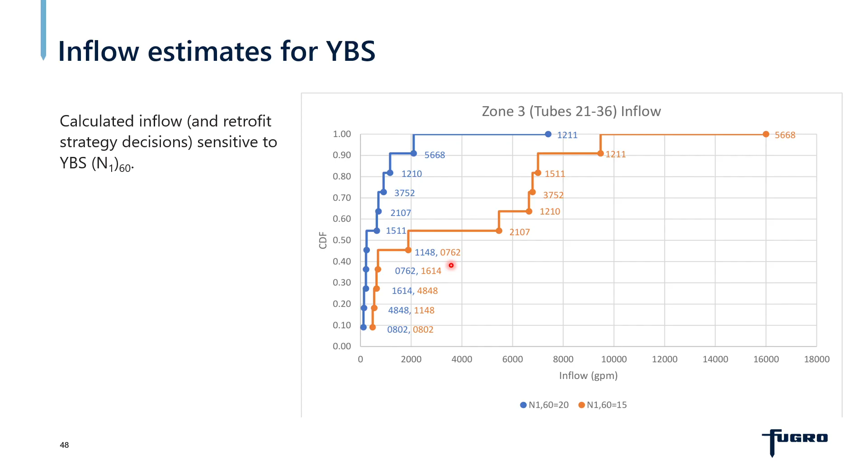So presented with this information, this is where we started working with the owner, and they really didn't know what to do. Should they design for this level of inflows or that level? What should they do? And we said, the best thing is to cast this into a more rigorous probabilistic framework. At the same time, the structural engineer identified areas of uncertainty in the tube, parameters that would affect this response. So we adapted the framework that I previously discussed for this particular problem, and we developed project-specific fragility curves.

So starting from an intensity measure, we set the spectral acceleration, I think it was at 1 second. And as a function of stratigraphy and the relative density of this sand, came up with the demand parameter, which is the residual soil displacement. Then with the residual soil displacement as an input, and as a function of soil springs that control the interaction between the soil and the tube, calculated strains through the modeling that SC Solutions did that I previously showed.

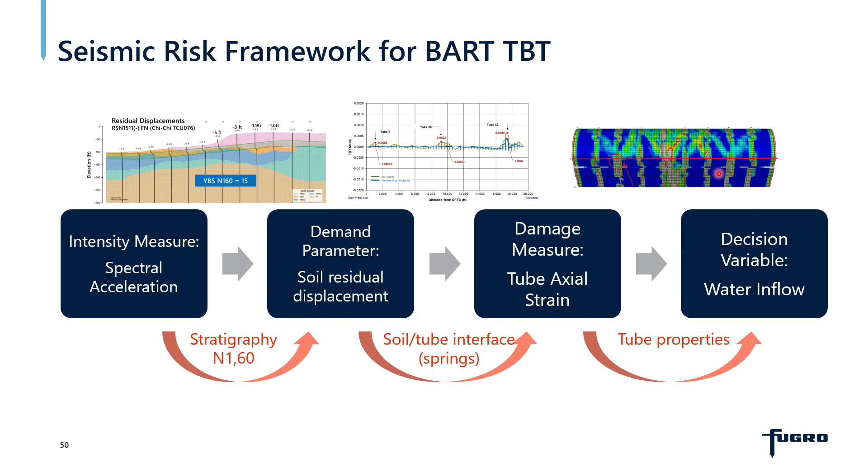And then with these strains as an input and as a function of the tube properties, we calculated cracking and inflow. So we came up with fragility curves to essentially model every step, from the ground motion input and the return period all the way to water inflow in the tube.

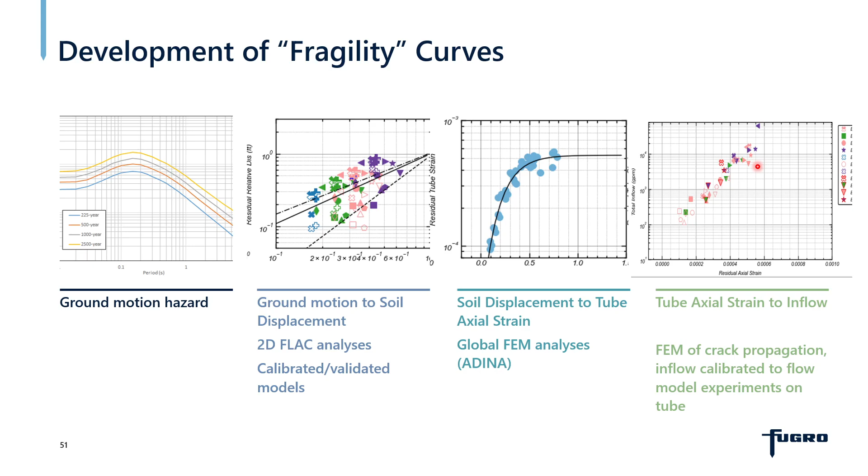Not displacements, not strains in the tube, but really how fast water was coming in. And then this essentially relates to how fast you can evacuate people. So

again, we developed a logic tree where the key areas of uncertainty were modeled as separate branches. Here we even modeled stratigraphy with some uncertainty. That was with respect to the extent of the Young Bay mud sand, how far behind upslope of the tube did it extend. As I said, the relative density, the soil springs, which method do you use? Do you use the method by Idriss and Boulanger? Do you use the method by Kramer? There is quite a bit of uncertainty there that people usually don't incorporate in analysis.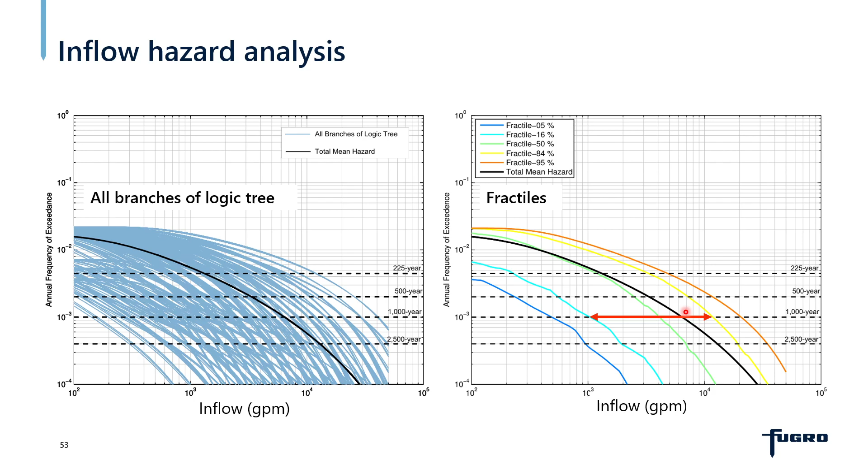So with that, in looking at a summary, what is our client's goal? I presented 2 projects where essentially our clients want to make decisions to meet some engineering objectives for their projects with limited resources, and they were unable to do so with the more conventional approaches that exist. The main challenge was essentially uncertainty in the ground conditions, inherent variability, but also uncertainty in how a complex system responds to earthquake loads.

For these projects, and with different focus and to a different extent, the geotechnical approach was threefold. The first is that we looked at data collection with a very purposeful attitude, with the goal to maximize the uncertainty reduction given the constraint of the project. So we planned the explorations and the laboratory testing with the goal to extract the most information possible out of a limited number of explorations and reduce the uncertainty as much as possible. That was for the Port of San Francisco project.

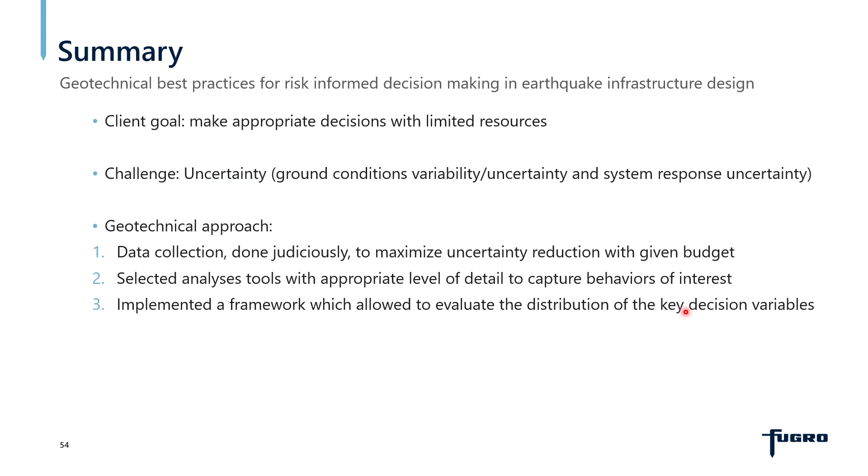We selected analysis tools with the appropriate level of detail, selected to capture the key behaviors of interest. And then we implemented a framework that allowed the client to evaluate the distribution of the key decision variable, but not only that, allowed them to make decisions.

So with that, sort of lessons learned from these 2 projects, what can we do as geoprofessionals in the projects that we deal with day to day? And I would say call for action here. Be very purposeful about the goals and objectives of the site investigation and laboratory testing plan. Execute the right site investigation well. This is what my colleague and former supervisor Ray Wood likes to say in Fugro. Do not execute the right investigation wrongly, nor the wrong investigation well. So the right investigation well, it's important.

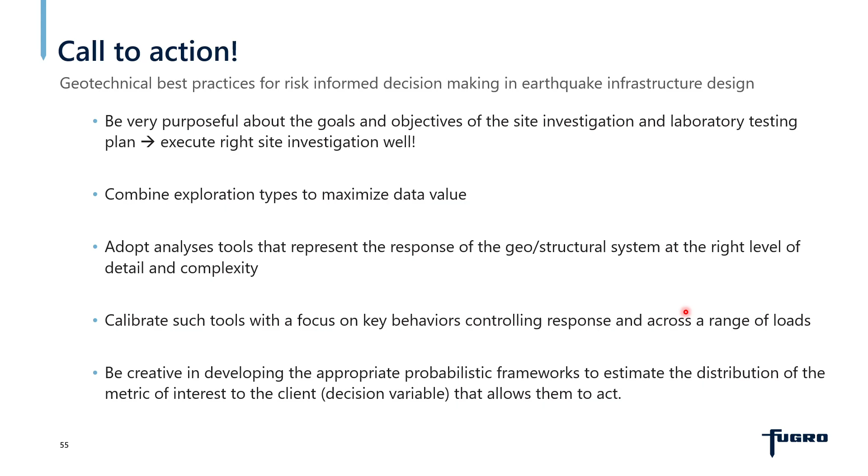Consider combining exploration types to maximize data value. Adopt analysis tools that represent the response of the geostructural system at the right level of detail and complexity for the purpose of each study. Calibrate such tools with a focus on key behaviors controlling the response and across a range of loads, which is important especially when you're looking at risk assessment, spanning a range of earthquake loads from weaker to stronger. And then be creative in developing an appropriate probabilistic framework to estimate the distribution of the metric of interest to the client, parenthesis decision variable, that allows them to act.

And so, some acknowledgements: there is really no innovation or ability for a practitioner to push the state of practice if there is not a receptive and open-minded client on the other end. So I'd like to thank Zakaria Samare and Mark Salmon of BART and Steve Reel from the Port of San Francisco for being exactly that. Nathan McCullough from Jacobs for being a very good partner. He was the program manager for Jacobs on the Port of San Francisco project.

A peer review panel which supported and encouraged our approach and made some good suggestions along the way. My colleagues Ray Wood and Rod Edis that created a culture in Fugro to discuss issues about ground risk, but also how to manage ground risk. But more importantly, my colleagues Jose Ugalde, Alfredo Fernandez, and Adam Price, who are the brains and the hands behind implementing and delivering the approaches that I have presented today. And thank you for your attention.